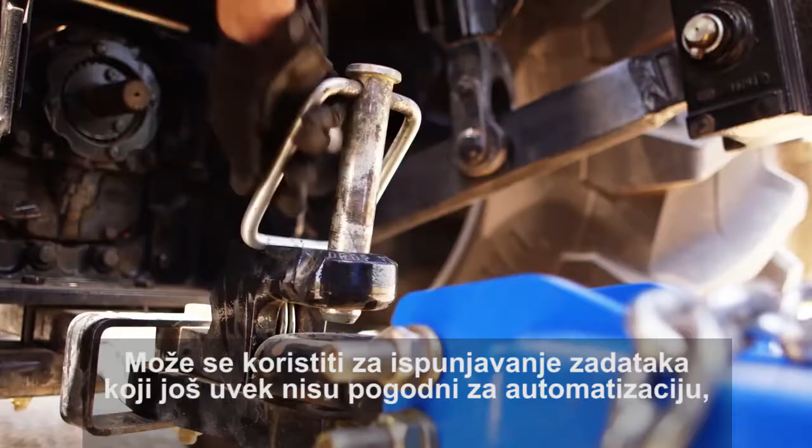Farmers prize operating flexibility, so with a cabbed autonomous tractor in the farm's fleet, farmers effectively have two machines in one. It can be used to complete tasks which are not yet suitable for automation. And then, when the operator's finished his task, it becomes an autonomous tractor.

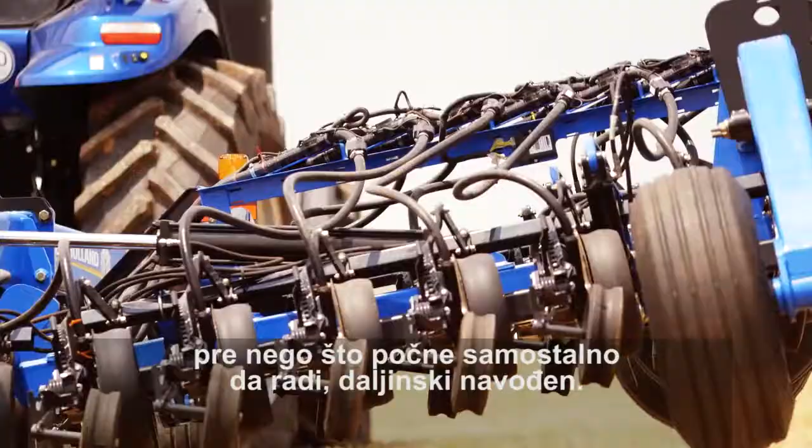With CNH Industrial's latest autonomous technology concept, the tractor is able to make its own way to the field, along mapped private on-farm paths, before it starts to work remotely on its own. We know that modern technology has improved the lives of farmers and farm workers, but at key times of the year, agriculture still demands long hours to bring in the harvest or to get the next crop planted. Autonomous tractors make the most of sometimes short weather windows and can extend the working day to a full 24 hours.

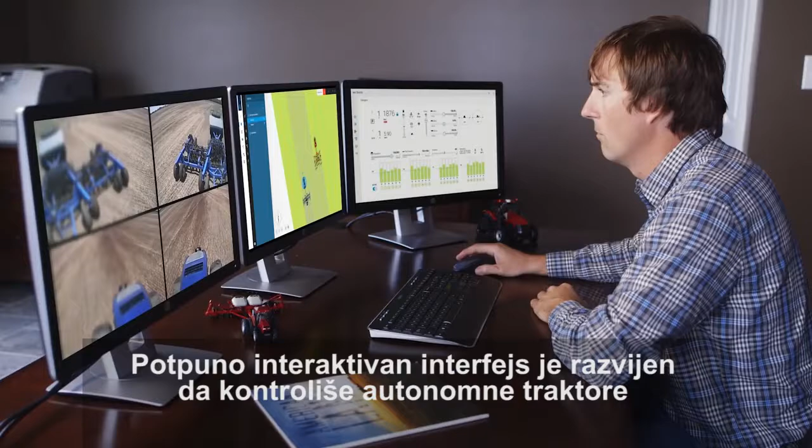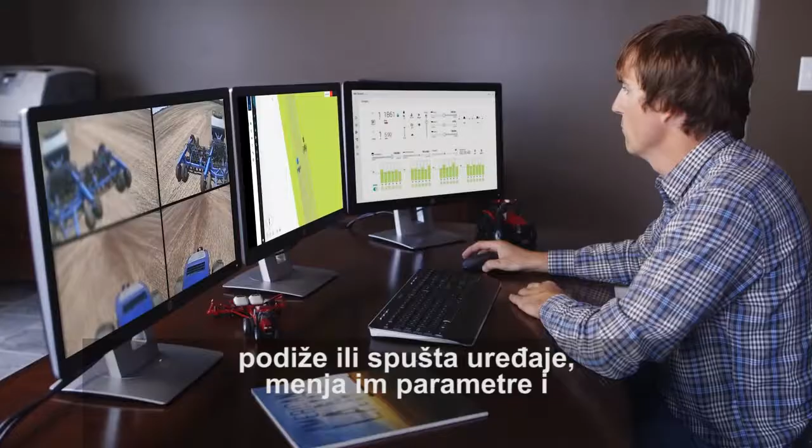A fully interactive interface has been developed to control the autonomous tractors with the immediate and secure recording and transfer of farm data. Farmers are able to use software which automatically plots the most efficient in-field paths, use combinations of implement widths, raise or lower the implements, modify implement parameters, and receive real-time views from the tractor's onboard cameras.

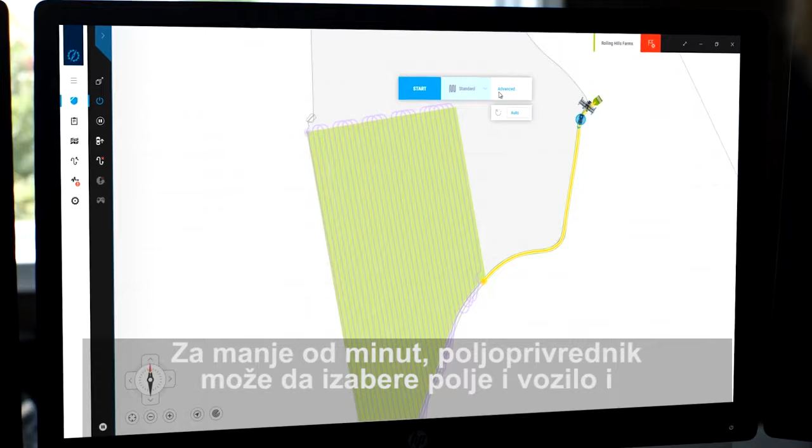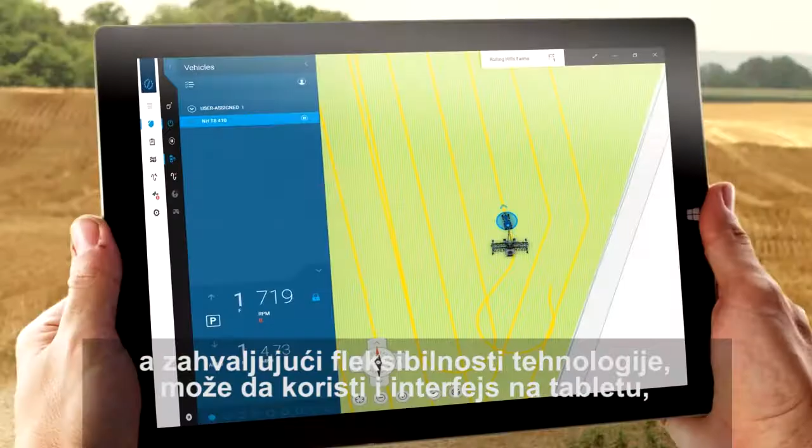In less than a minute, the farmer can select a field, a vehicle, and send it on a pre-prepared route. The farmer can continuously monitor the tractor's progress and change parameters as required, but thanks to the flexibility of the technology, they can also use the mobile handheld tablet interface, freeing them up to manage other tasks on site.

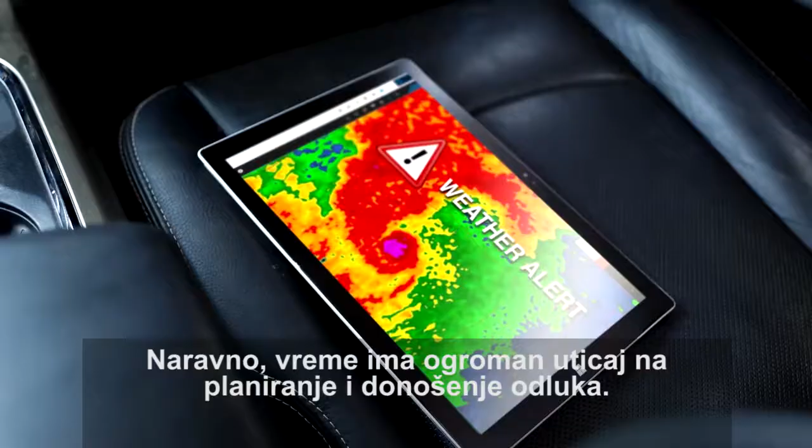Weather, of course, has a huge impact on planning and decision-making. Upon receiving a weather alert, farmers can decide remotely where to send machines to complete a task in the best conditions before the next weather event. In the future, autonomous technology will react to weather data and stop automatically when conditions deteriorate, and then start again when they improve.

Autonomous tractors can also work in tandem with traditional machines, whose drivers can supervise their activities. Fully autonomous working is also a reality with 2, 3, or even more machines running simultaneously in the same field. It is conceivable that in the future, these autonomous technologies will be extended to encompass a farmer's entire machinery fleet, including combine harvesters, grain transport, and support vehicles.

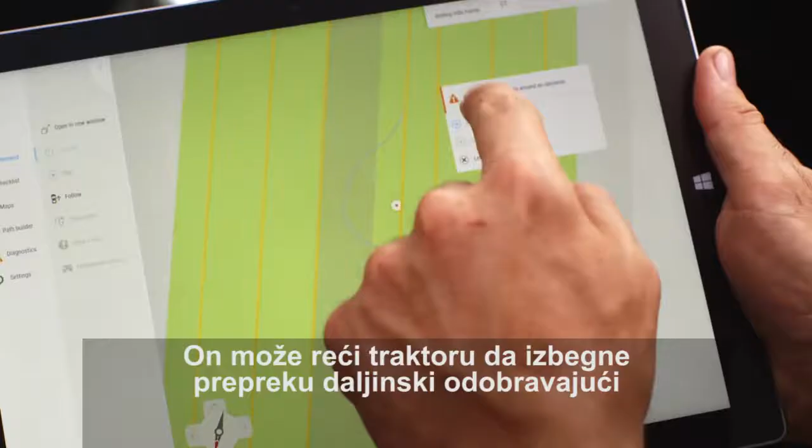Autonomous technology also provides advanced obstacle detection. The tractor is able to detect obstacles through a combination of infrared, radar, and LiDAR, which uses range-finding lasers. When the tractor encounters an obstacle, the farmer is alerted through the tablet interface. He can then tell the tractor to avoid the obstacle by remotely approving an automatically generated alternative path around it. Alternatively, he can instruct the tractor to drive straight over an obstacle.

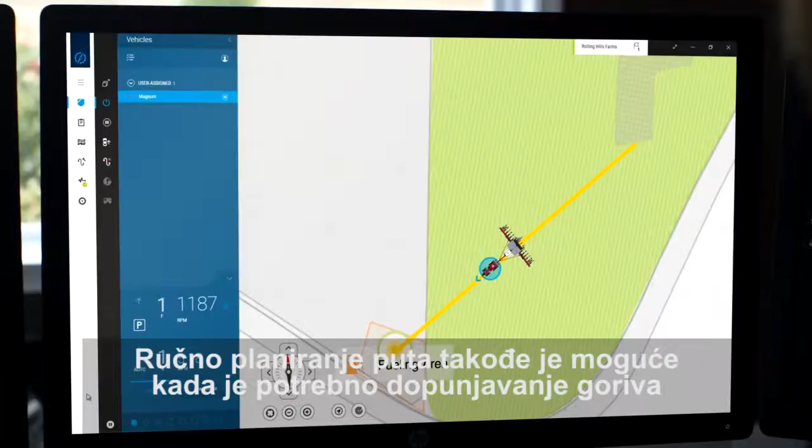The tractor's intelligent obstacle detection system can also tell when an obstacle crosses its path and will bring itself to a stop. Once the obstacle is cleared, it'll continue on its route. Manual path plotting is also possible when refueling or when custom paths are required.

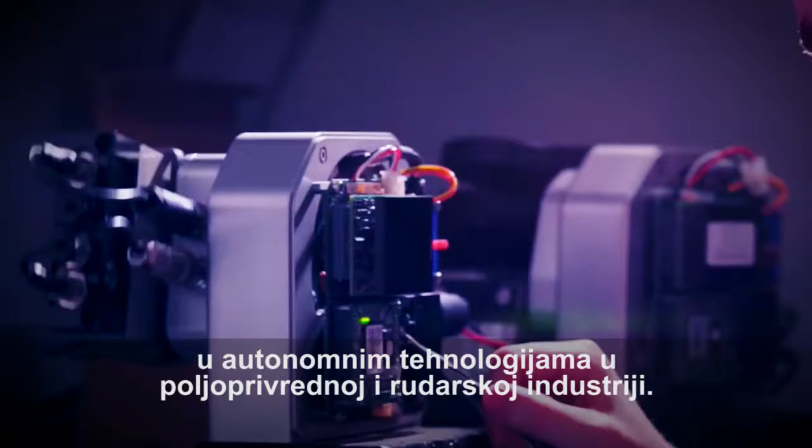CNH Industrial enjoys a historic working relationship with its technology provider, Autonomous Solutions. ASI has global experience in autonomous technology across the agricultural, automotive, and mining industries. Together, we are leading the way in bringing this technology into agriculture.

Of course, this isn't the first time that CNH Industrial's agricultural equipment brands have led the way. For more than 170 years, we've been at the forefront of developing advances in agricultural machinery. And we're the first manufacturer to factory-fit precision farming technologies. Since then, we've continued to invest in these technologies, helping farmers to monitor yields, automatically alter fertilizer rates based on prescription maps, and develop precision in-field guidance paths.

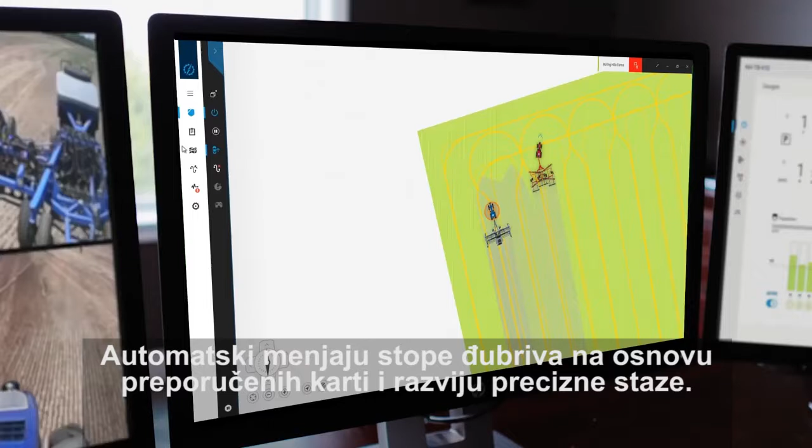And now, once again, CNH Industrial is leading the field in the development of cutting-edge farming technology concepts. Our concept of autonomous tractors will do far more than simply go out and work. In the future, they'll offer farmers total control of the vital data that will allow them to make the informed decisions necessary to boost productivity and overall efficiency. Better still, this is not an all-or-nothing approach. Our autonomous tractors could be seamlessly added and integrated into existing fleets.

The autonomous tractor concept from CNH Industrial provides a tantalizing glimpse into the future, when the interface with big data will provide connected farmers with not just the machinery needed to work the land, but also the help they need to make their most critical business decisions. The autonomous tractor concept from CNH Industrial.